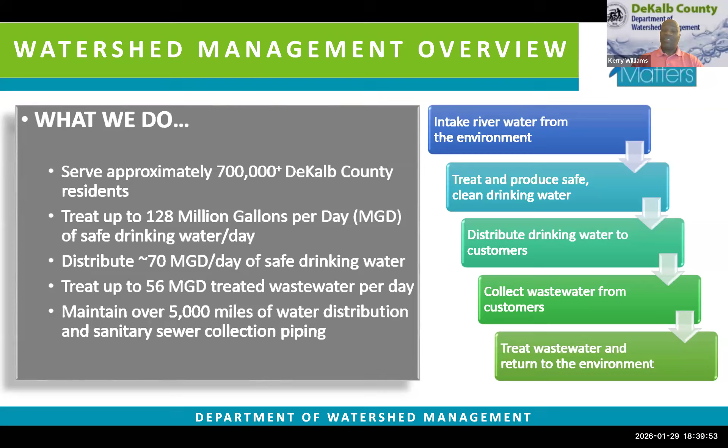People roughly from about Memorial Drive southward and a little bit further have their waste treated via the Pole Bridge or Snapfinger wastewater plants, while those to the north are treated via the City of Atlanta's RM Clayton plant, and a small portion by Fulton County. We do this with a team of experts daily. It's a 24/7 operation — rain, sleet, snow, bad weather — we still have to be there. Next slide, please.

So why are we doing this? We didn't just wake up and decide, oh, gee, we want to replace this. We're doing it because this water main has had several breaks in close vicinity to each other, and we noticed the deterioration in the pipe.

So why are we doing it? We want to reduce the number of breaks and improve customer service. We want to minimize the disruptions to the residents. So hopefully we get this fixed — hopefully we'll all be retired or whatever before we ever have to mess with this thing again. It's a 36-inch transmission main, so it's going to be inconvenient while it's under construction, but once it's finished it should be a much better improvement in the area.

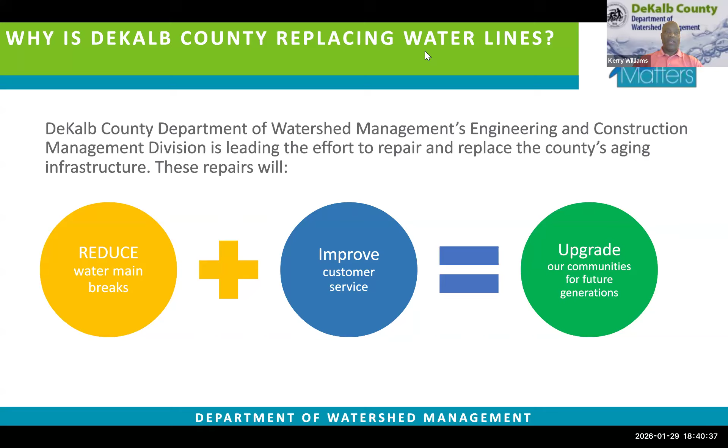Next slide, please. How are we doing this? We have a team of experts — contractors and consultants — all of which work together with DWM to help put these projects in place.

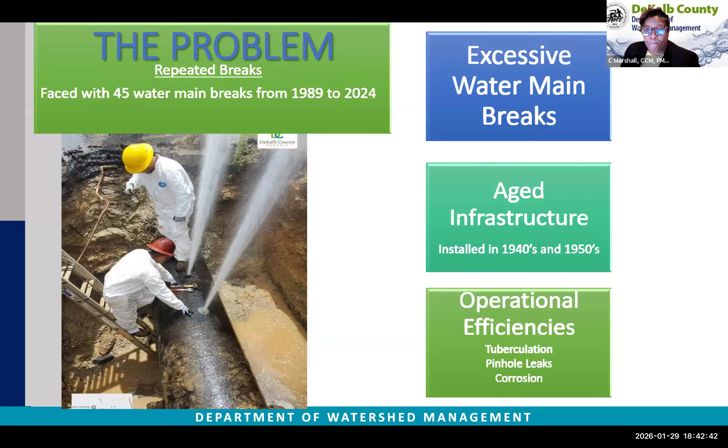Our solution: in 2024, the Board of Commissioners approved a new capital plan for $4.27 billion. That is for projects to be completed from 2025 to 2034. This particular project, Peachtree Boulevard Water Main Project, is a $46 million project that is within that plan.

My team, the capital team, is responsible for getting the work done. My team includes 4 DWM construction managers and 12 licensed inspectors. Along with the in-house staff, we're also supported by an engineering firm. Currently for this job, it's a firm called CGA, a joint venture between CERM, Gresham, and Atkins.

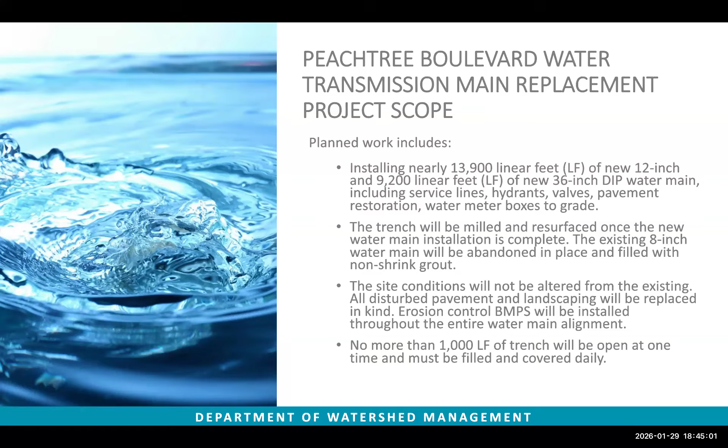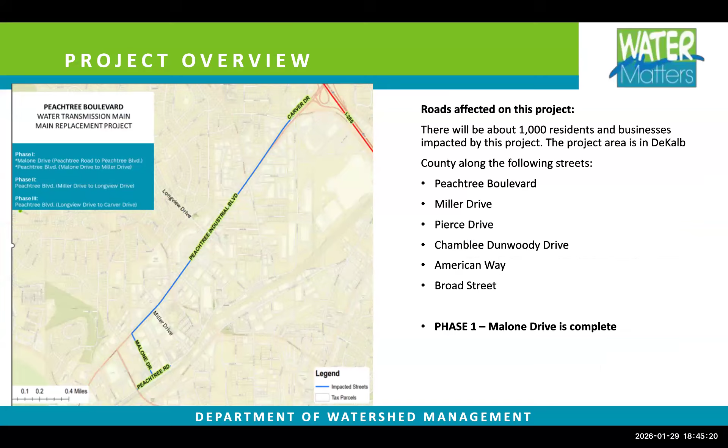About 1,000 residents and businesses will be impacted by this project. The roads that will be affected are Peachtree Boulevard, Miller Drive, Pierce Drive, Chamblee Dunwoody Drive, American Way, and Broad Street.

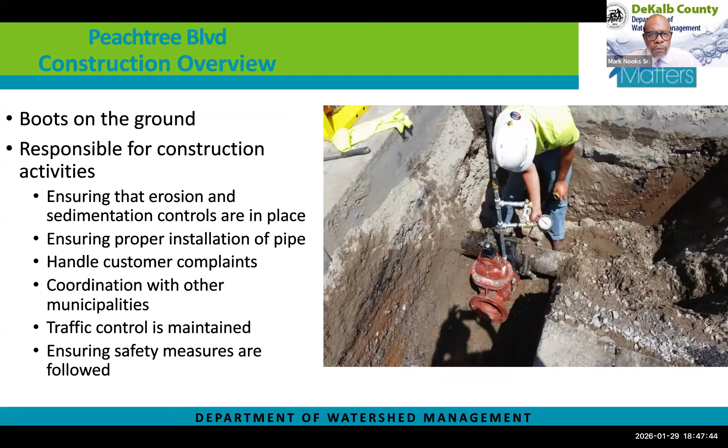Next slide, please. So the methods of construction. On this project, we'll actually be using two different methods.

The first method is the open cut method. It's a widely used technique for installing water mains. It involves excavating a trench along a desired path, placing the new pipe in the trench, then backfilling and restoring the surface. This method provides direct access to the pipe, making it ideal for straightforward installations and repairs. While effective and relatively simple, it can be disruptive. It's most commonly used in areas where surface disruption is acceptable or where trenchless methods aren't feasible.

There are areas of this project where we cannot do an open cut because that would create disruptions. So the second method of construction is the jack and bore technique. We dig a pit down in the ground, and it involves mechanically pushing a casing pipe horizontally through the ground while excavating soil from inside the casing as it advances. Once that casing is installed and pushed to the other side of the street, we insert the water main and place it inside. What that does is it doesn't disturb the top portion of the asphalt, and it doesn't create any disruptions in traffic.

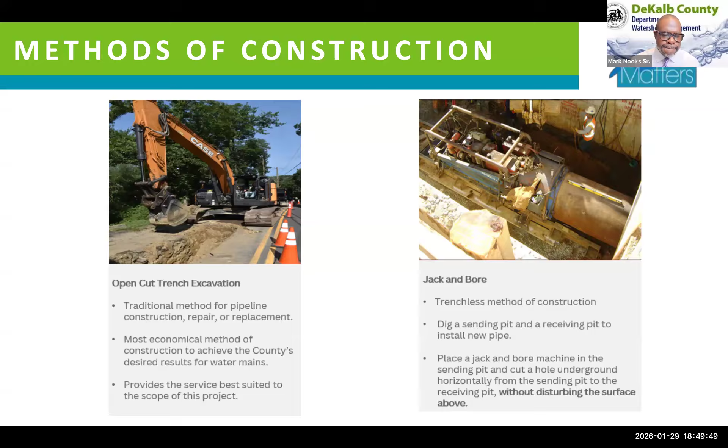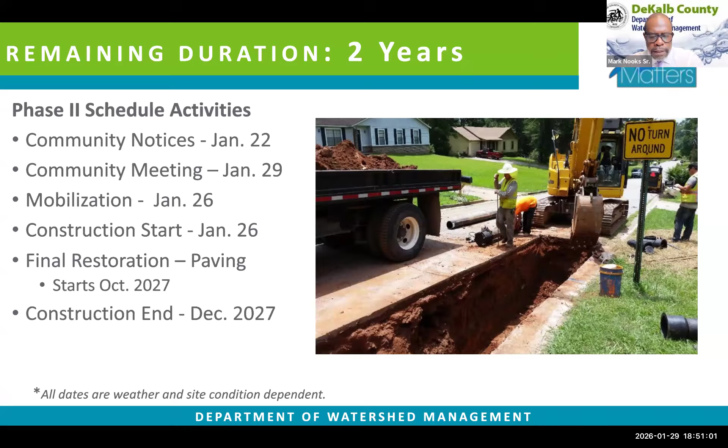As you can see, we had put down some BMPs and erosion barriers. Construction will start full speed ahead next week, and the final restoration for paving will start sometime around October 2027. The end of construction will, depending on weather and site conditions, be December 2027. Again, let me reiterate that these dates depend on the weather and site conditions. Next slide, please.

So overall, the construction team will ensure that the project is completed and the property is restored. The picture to your left depicts a typical construction site or work zone, and the picture to your right shows the roadway and how it will be restored in kind or better.

We see in the top picture on the right that half of the street is being paved. Depending on the age of the pavement, we might just do a trench style paving. But looking at this project, due to GDOT permits and requirements, I think we would have to pave half of the roadway itself.

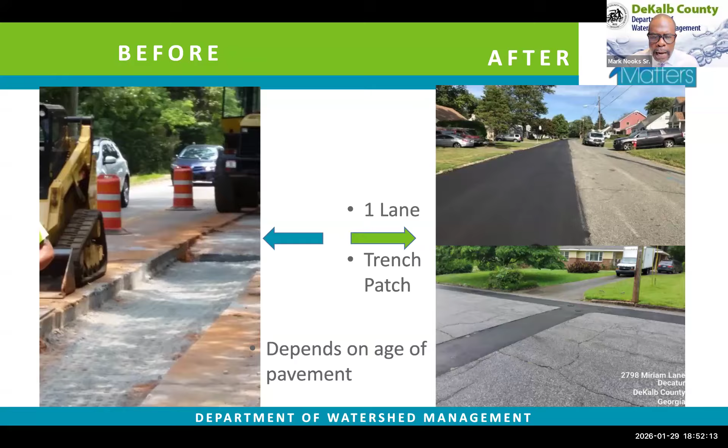Now that is it for my presentation. I will now turn it back over to Ms. Cassandra Marshall, who will discuss community awareness.

All right, thank you, Mark. I will now discuss community awareness and what you should expect. Next slide.

So what to expect? Of course, there will be construction deliveries, foot traffic, vehicle traffic, and heavy construction equipment in particular work areas, kept within our work zones. For safety and security, there will be increased noise from backup alarms on equipment, asphalt saw cutting, and its removal. Sometimes you have to hammer on the asphalt to break it loose to haul it off from the site. Another security measure is that county contractors and employees have an identification badge issued by the county showing that they are a DeKalb County approved contractor or employee.

Our work hours for this portion of the project will be from 9 a.m. to 4 p.m. However, the contractor will probably stage himself a little earlier. That is just when we would do our lane closures on Peachtree Boulevard.

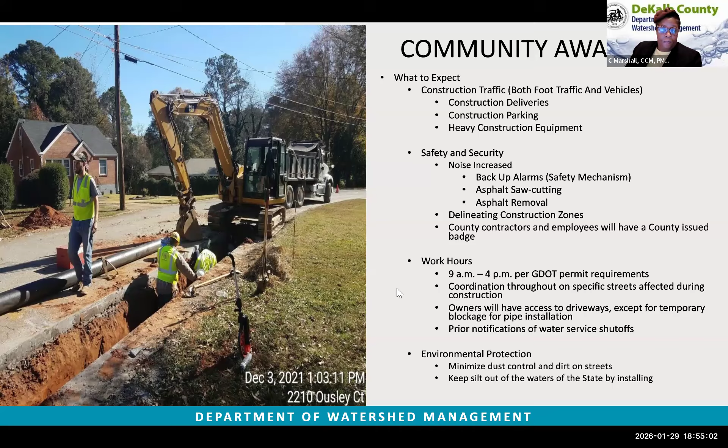Again, the contractor will provide traffic control, guiding residents and traffic throughout the work zone by means of flaggers or traffic control devices. The jack and bore crew will be the first to start back up, planning to begin next week Monday at Peachtree Boulevard and Malone Drive, headed toward I-285. Once that jack and bore is completed, a pipe crew will start immediately after, around March 16th of this year. Also, the contractor has identified a laydown area, an empty parking lot next to the Chamblee Senior Residences at Malone Drive and Peachtree Road.

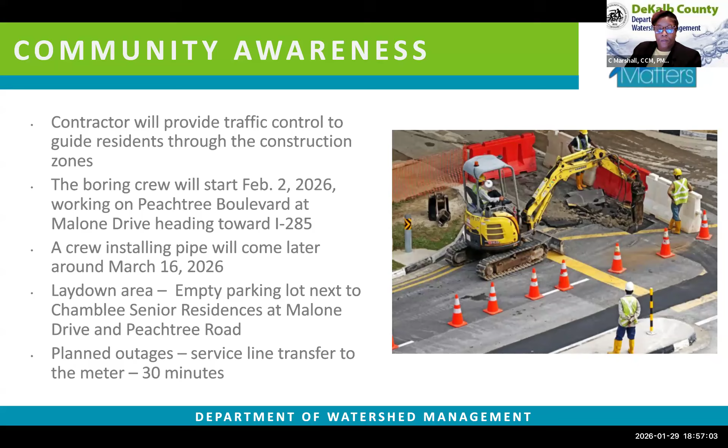Next, you will hear from Ms. Angelita Streeter about the public communications update. Good evening, everyone. My name is Angelita Streeter, and I am the Public Outreach Specialist for this project. Tonight I'll share the methods DWM will use to communicate with you, but first I want to briefly recap what has occurred so far within our community. Our outreach team has engaged with residents in high-impact areas, and our construction and engineering team has also worked with residents to obtain right-of-entry access to their properties.